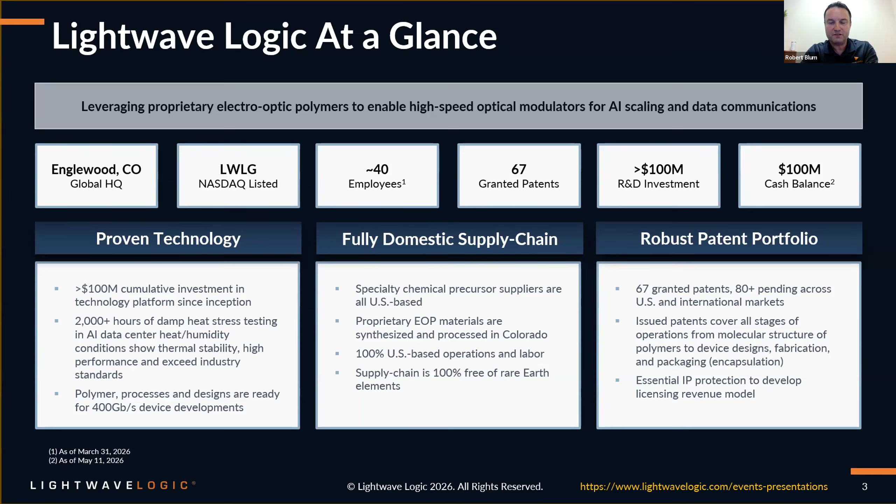We have a fully domestic supply chain, so the polymer is manufactured here and synthesized here. And we have a very broad patent portfolio, 67 granted patents and many more pending. Our business model is really around licensing the IP, enabling the foundries and the design houses to make enhanced silicon photonics chips using our material to get to high speed, very low drive voltage modulators.

One of the things that I'm personally very excited about is the silicon photonics momentum that we're seeing. So when we launched our first silicon photonics product at Intel in 2016, the total transceiver market was about $5 billion, and the silicon photonics portion was minuscule, really. And 5 years later, in 2021, the transceiver market was about $11 billion, and less than a quarter was silicon photonics. So picking up some momentum.

This year, we're really seeing the cut over where silicon photonics is more than half of the transceiver market. So about $20 billion in transceiver sales is based on silicon photonics today. And the market forecast shows that this will grow to more than 70% by the end of this decade. So very exciting times for silicon photonics. And this is really the platform that we're leveraging.

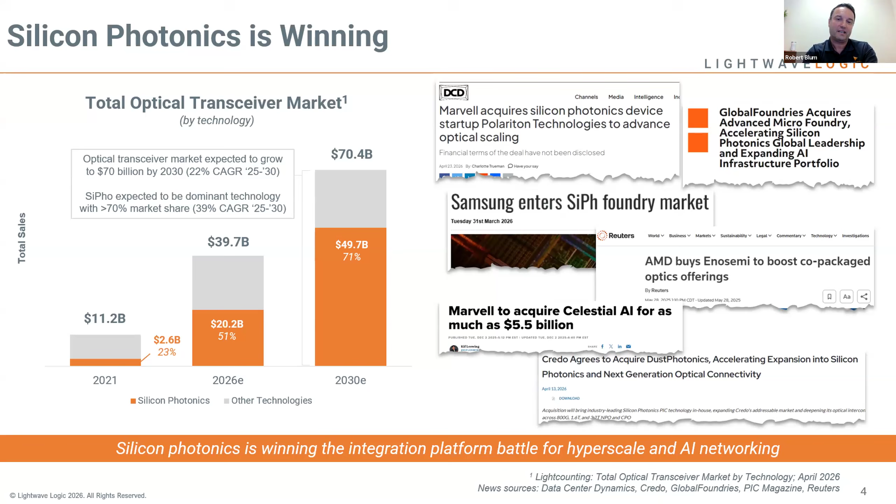And obviously, silicon photonics is great because it's wafer level manufacturing. It leverages all the goodness that CMOS and wafer level manufacturing gives you, but it has some limitations in terms of performance. And when you look at what is needed for some of these AI clusters, they're very much limited by the connectivity, and you're looking for high speed or advanced modulators that can integrate very tightly, that have high bandwidth, but also very low drive voltage, low power consumption, low insertion loss, and high reliability.

And so there's a few opportunities to enhance silicon photonics. If you look at the two main options, one is you can use inorganic electro-optic materials, such as thin film lithium niobate or barium titanate or similar materials that are largely not compatible with silicon photonics foundries, but you can add them afterwards. Or you can use organic electro-optic materials like the silicon organic hybrid modulators that we're going to talk about today.

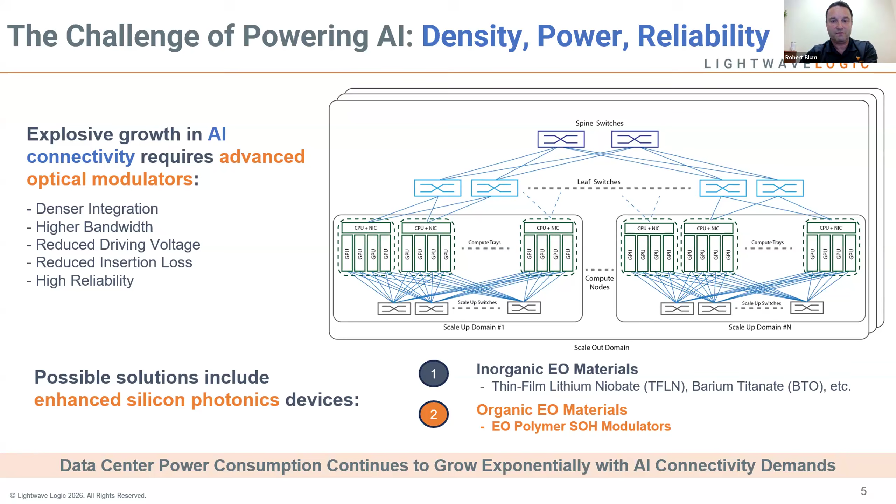And one of the big advantages is that it's a material that is compatible with silicon photonics foundries. You can integrate it through spin coating, just like a photoresist. So foundries are very familiar with that material and the deposition methods. And also the electro-optic coefficient is much, much higher than those of the inorganic materials. So you can make much more compact modulators than you could with some of these inorganic materials like TFLN.

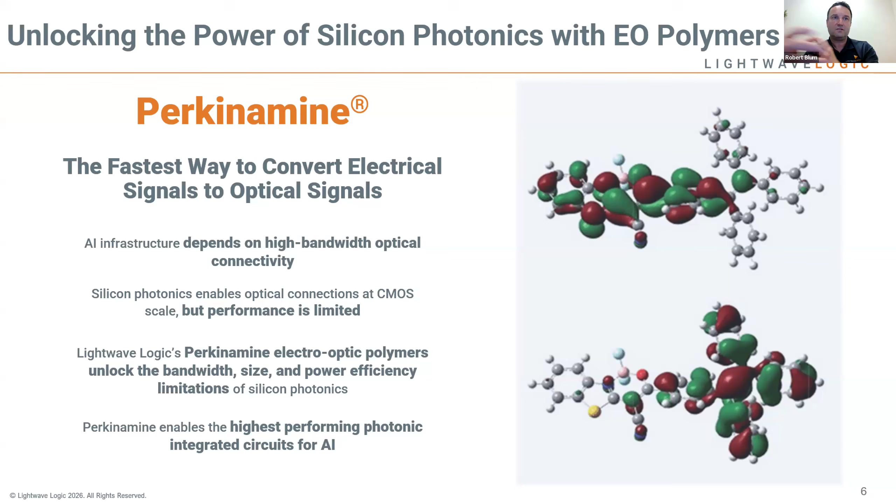So perkinamine is our chromophores, and they're dipolar molecules that we design and synthesize here in-house, and they're enabling us to get to these high figures of merit. If you look at the fundamental effect, you have a dipole molecule that in its ground state is already polarized. Then when you apply an electric field, the electron cloud moves over. So you're basically polarizing the molecule.

And because you're only moving electrons around, this is essentially instantaneous. So you're not limited by carrier mobility or other effects that limit the performance of other modulator technologies. So for all practical purposes, the bandwidth of the material itself is essentially unlimited for the applications that we're looking for.

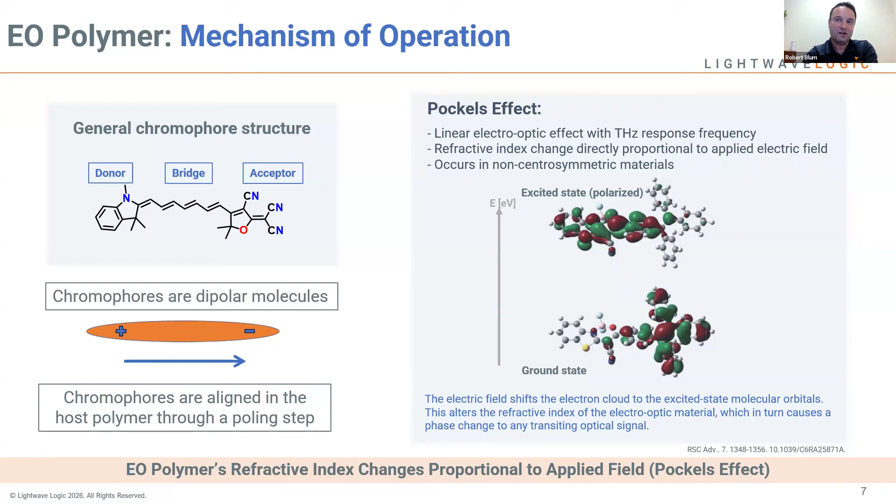So in essence, you etch a slot into your silicon modulator, and then you backfill it with polymer, so that you end up with a hybrid mode where the mode is in the silicon and in the polymer, and you're essentially only limited by the RC constant here.

And so you're making these Mach-Zehnder modulators as an example, even though you can make ring modulators as well. But for these Mach-Zehnder modulators, you basically have two arms that are both filled with polymer. And then what is key is that you encapsulate it, because you have to protect the material from oxygen to prevent degradation, and particular photooxidation.

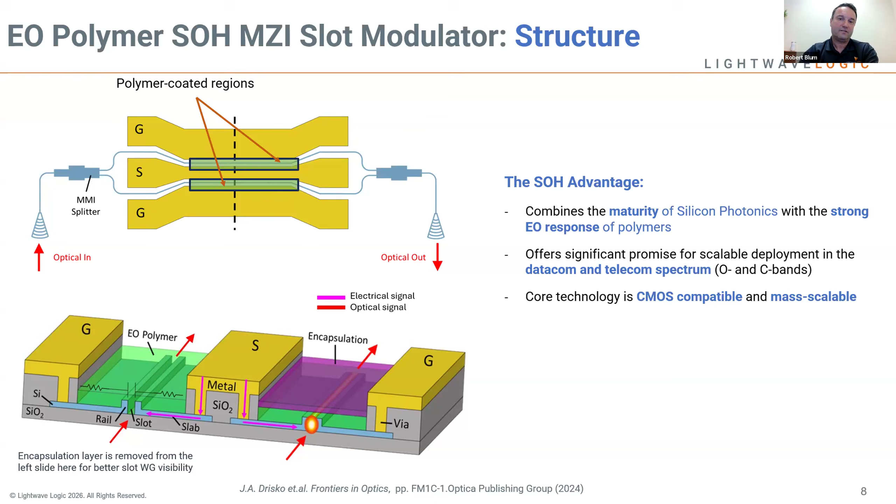But the key part for us is we're really combining the maturity of silicon photonics with the very strong electro-optic response of these polymers, creating these silicon organic hybrid devices for really wafer scale photonic integrated circuits, and leveraging everything that's good about silicon photonics, and enhancing it with the electro-optic polymers, right? So it's really key for the scalability, because when you look at what the hyperscalers need, it's really millions and millions of devices, and for that you need a mature, scalable technology.

One of the key parts is how to deposit that. So basically, the foundries have to etch these slots in the waveguides. They have to open up the oxide so that the slot becomes accessible. And then we deposit an underlayer and the actual polymer down into the slot. We then essentially remove it where we don't need it. And then we deposit the encapsulation, and then subsequently, we remove the encapsulation where we don't need it. So that's the last step.

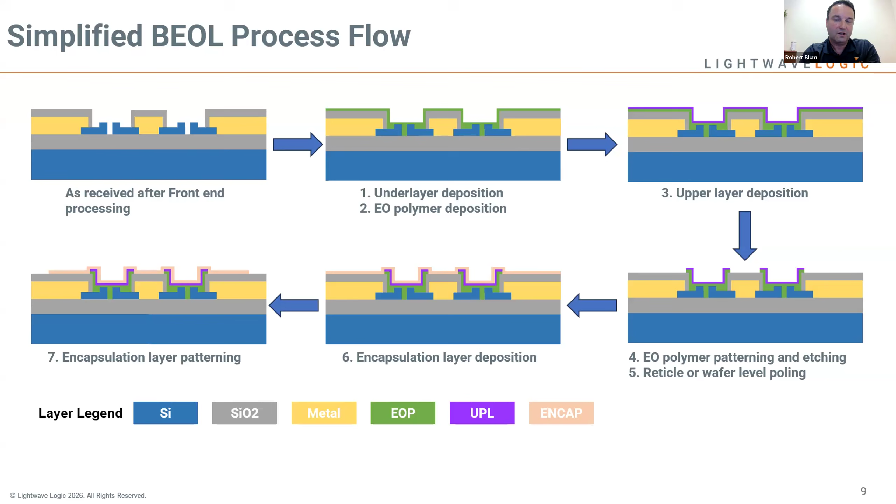So it's a pretty simple, simplified process that I'm showing here. There's obviously a few more steps, but all the tools, all the processes are standard to CMOS foundries. So it's really very straightforward to implement these deposition steps, the spin coating, and the encapsulation processes in the foundry. We use basically atomic layer deposition for the encapsulation, and for some of these other layers. So all tools that are now standard in the foundries.

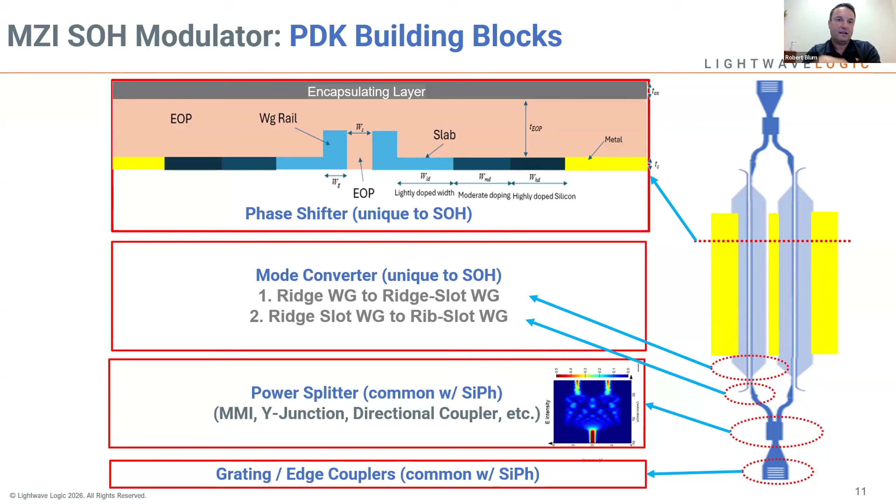So this is obviously the key part of the phase shifter. And these building blocks are part of the PDK that we have. So if you, for example, look at this mode converter, if you start on the top right, you have the ridge waveguide, which is in silicon, and again you have to transition that to this ridge slot waveguide in the middle, where you have a little bit of a hybrid mode, and then eventually it transitions to that rib slot waveguide, where you have basically this slab that is kind of containing the mode, and then obviously the slot section, which is really critical.

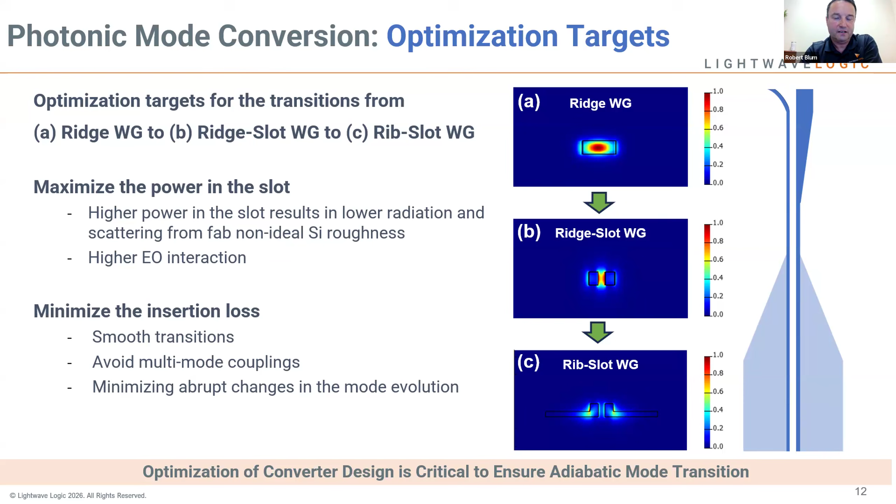So those transitions have to be adiabatic to minimize losses. You obviously want to have them as short as possible, because you don't want to spend a huge part of your modulator length on those tapers. But again, key for good performance is obviously these taper sections, and they will vary from foundry to foundry, because each foundry has slightly different geometries that they're able to produce, or that are part of the regular PDK.

And then on the phase modulator section, this is where it becomes very, very interesting. So again, as I mentioned before, we're basically RC limited. If you look at the frequency, you want to have as low R and as low C as possible to get to high frequency. So in a way, you want to increase the doping, but then obviously there's a bunch of trade-offs, right? So if you have high doping, you will also get higher losses, because the mode will start to see the doping in your slot, so you have to trade that off.

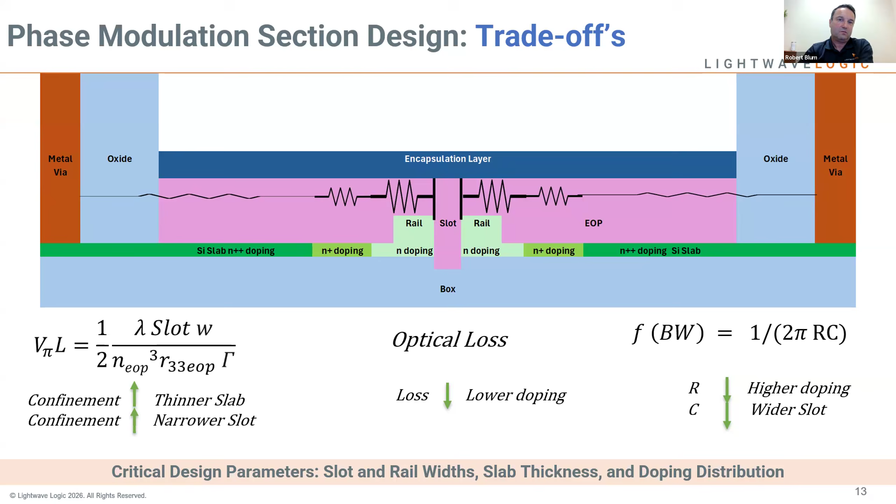Similarly for the slot, if you make the slot too narrow, then you have those trade-offs basically with your VPL and also with your frequency. So there's a few different trade-offs: the slot width, the rail width, the doping, the slab thickness, all of these are part of the trade-offs that you have to work with. It's pretty straightforward in a way, but obviously you have to implement it for a specific foundry and really optimize the doping, and the transition from a highly doped N++ doping to the low doping closer to the mode is very, very critical.

And so, to give you some examples of the expected bandwidth, here for different lengths. For example, if we make quite a short modulator, 250 micron long on the left-hand side, you see here we have a 3 dB electro-optic bandwidth of about 138 gigahertz in this simulation. And as you go to longer modulators, for example, the one on the very right would be 1 millimeter in length, so 1,000 micron length. Those show a 3 dB bandwidth of about 76 gigahertz.

But also what is very nice with these types of modulators is that there's no rapid roll-off in the frequency, so it's quite linear. For example, your 6 dB point is around 135 gigahertz or so. So this is very much workable for a lot of applications. And our VPL, which I didn't put on this slide here, is less than 1 volt millimeter. So for these devices here on the right, for example, you have drive voltages that are less than 1 volt peak to peak or lower. So this is quite advantageous in terms of performance. Basically, you can get very compact modulators, sub-millimeter, with bandwidth above 100, 110 gigahertz or higher, with very low drive voltages.

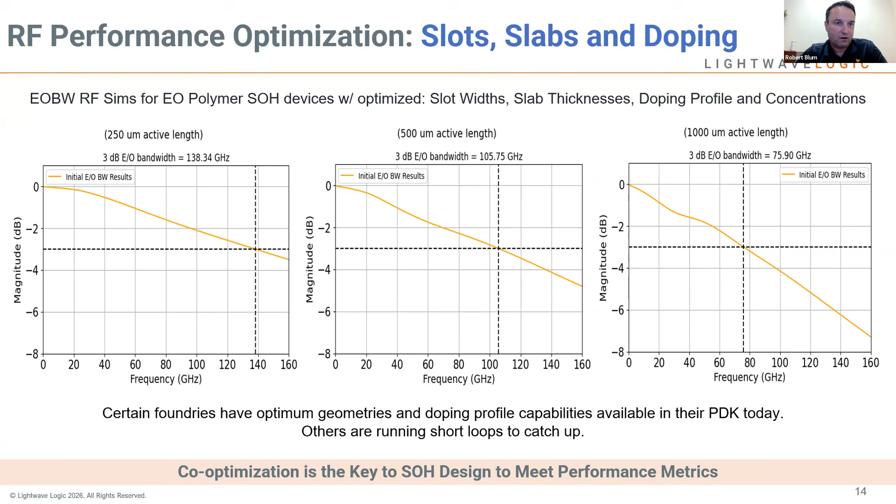So hi, everyone. Today I want to show you a library that we've built using SilTerra's silicon photonic platform PDK. Not just the static layouts, but I recorded a video showing how to bring components together to make a final device. Everything is written in IPKISS, so we script components and regenerate them on demand. So I'm going to walk you through this in a bottom-up way, starting from a slot waveguide, which is the core electro-optic element and the basic building block of the component, building up through the phase shifter test structures for on-wafer measurement, and finally a complete MZI.

So each step reuses the step before. So you see the hierarchy come together in KLayout. So Robert, we can start the video now, and I can show you guys a little.

So on the left, yeah, we have the library of our components that we design. We have a bunch of them, and the most basic one is the trace that I'm showing there. And the trace is basically a cross section. And what we do, we import IPKISS, the SilTerra PDK library and our library of components, the trace and the slot waveguide.

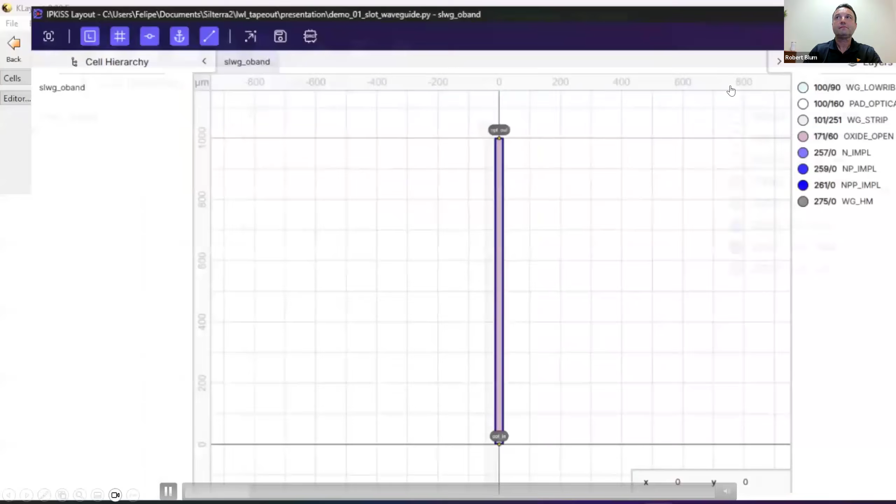Yeah, so you can see here just a straight segment of the slot waveguide. You can see that in IPKISS visualizer. You can also use KLayout to check it out. So you can see the numbers that we used in the parameters, such as the oxide open window that we put 20 microns wide in our example. This is the actual region where you etch the oxide and you deposit the polymer to make your device.

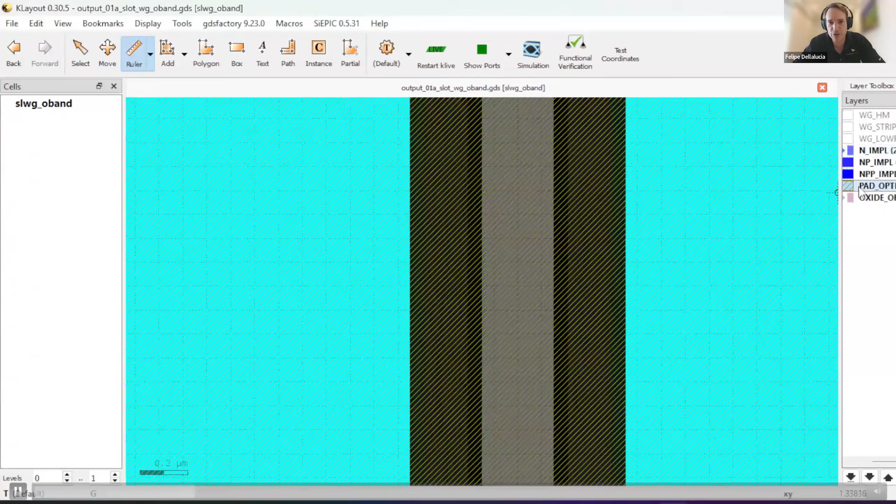It's also parameterized the rail width and the slot width that we're going to use in the waveguide. So in this case here, we use 200 nanometers for each. And we also have the doping profile parameterized. I have 2 microns and 5 microns for low doping and intermediary dopings. And the length, like I showed before, 1 millimeter, for instance, you can have shorter than that, that Robert showed in the simulations. So this is the basic building block.

From that, you can start increasing the hierarchy, such as making a phase shifter. So the same way that we did before, we just import the SilTerra PDK and the phase shifter component from our library. And you can set the active length the same way that we did before. We instantiate the cross section in the phase shifter. We use the same cross section that we used before, the active length. And it's also parameterized the metal width that we're going to use in the electrodes and the taper of the metals that we're using.

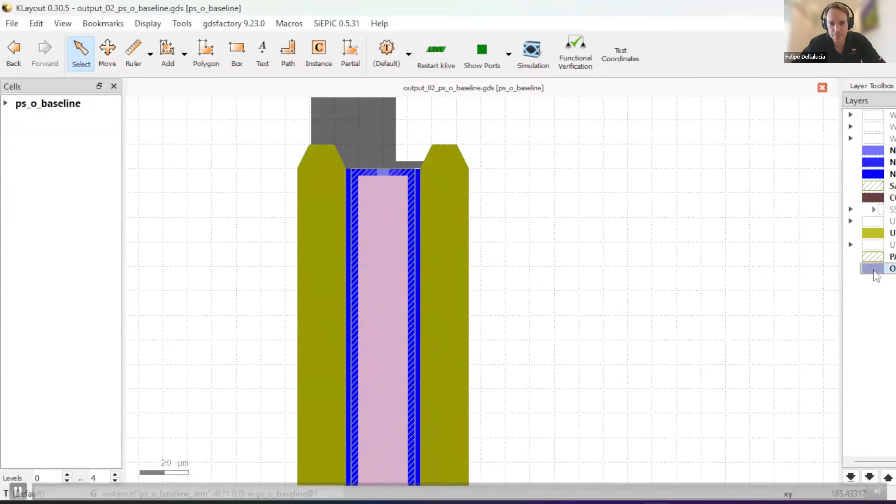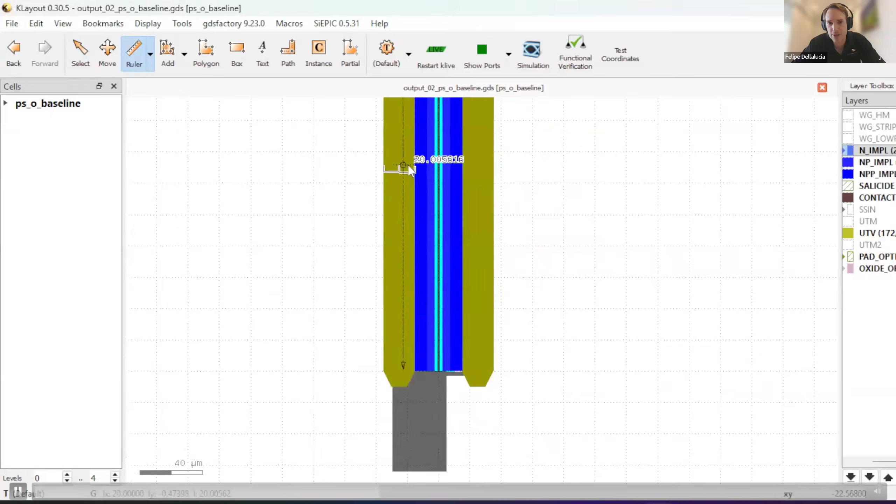So once you run your code, you can check out how the phase shifter starts to look like. So you have the oxide open window, the same one that we showed in the slot waveguide. We have the optical input and output on the top and the bottom, which are the mode converters. And we have the metal for the electrodes, 20 micron wide, like I showed in the parameter configurations. And the taper for that metal 10 micron long, we can also extend or make it shorter depending on your design. So this is the second level in the hierarchy.

We can also add bond pads to that design. So we also have a component there in which we include the phase shifter with the bond pads that I'm showing there. The same thing, we pick an active length. We use the same cross section that we have used before, the same phase shifter, and now we have some bond pads. The bond pads that we used are imported from SilTerra's PDK. So we just retrieve those.

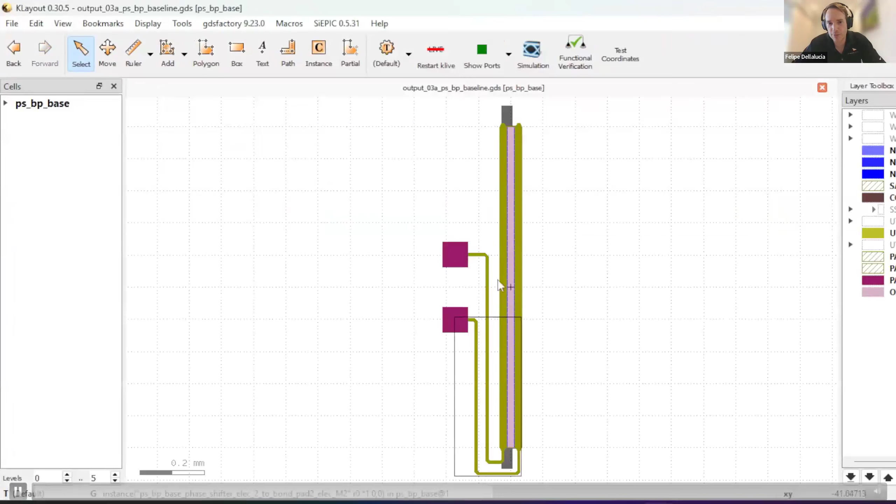We can also set the bond pad dimensions, how wide they are, and the spacing of the wires that we're going to use to route them. And then once you run it, you see the bond pads and the routing of the metals. So very simple and straightforward. You have the 80 micron bond pads in the full metal inputs and outputs port.

So here, for the next step, we can include the optics inputs and outputs. So we can add the fiber arrays and the grating couplers that we also import from SilTerra's PDK. So you also set the active length that you want. In this case here, we use the same parameters from the waveguide, the same parameters for the phase shifter. Obviously, you could change that, the bond pads, and then you can also set the fiber array that you're going to use.

In this case here, it's 4 grating couplers. We import that from the PDK with that command there. The separation between the grating couplers depends on your test measurement setup. So in this case here, I'm using 127 micron. And then you can just make a test key for that component, and you can run it.

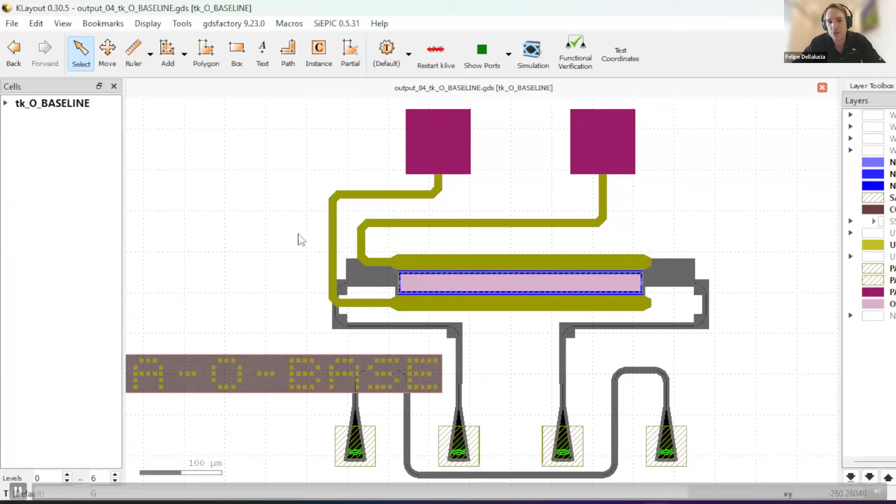And when you check it in KLayout or in the visualizer, then you can see the full phase shifter with the grating couplers, the fiber arrays, and the bond pads, the routing from the input to the output of the phase shifter through the mode converters, and lastly the grating coupler. So with this, you can do the poling in your polymer, and you can also apply voltage and do some slow speed modulation to extract parameters from your components such as VPI and loss.

Last but not least, I have here a quick demonstration of how you would make an MZI. The same way, you import the SilTerra PDK and the library of components that we have there. So we have the traces, and also an MZM from our library. That MZM, in that case, has no metal on it. It's just the phase shifters. But the components from the foundry, such as the MMIs, are present in that. The same way, we can set the parameters for the waveguide.

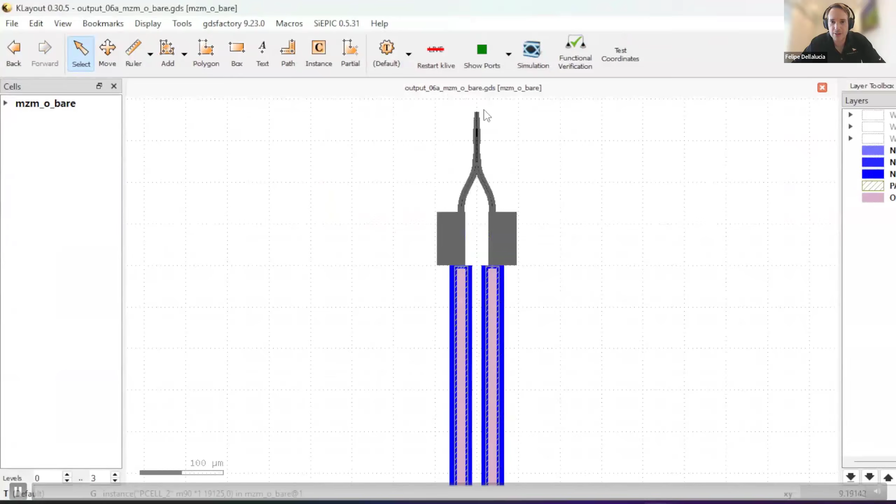And once we hit the run button, we can see the MZI with the 2 arms of the Mach-Zehnder. So on the top there, it could be your input. You have the MMI, you split the waveguide in 2. You have the mode converters for each side of the arms. You have the phase shifters for both sides. And then you have the output mode converters, and you combine them back using the foundry MMI.

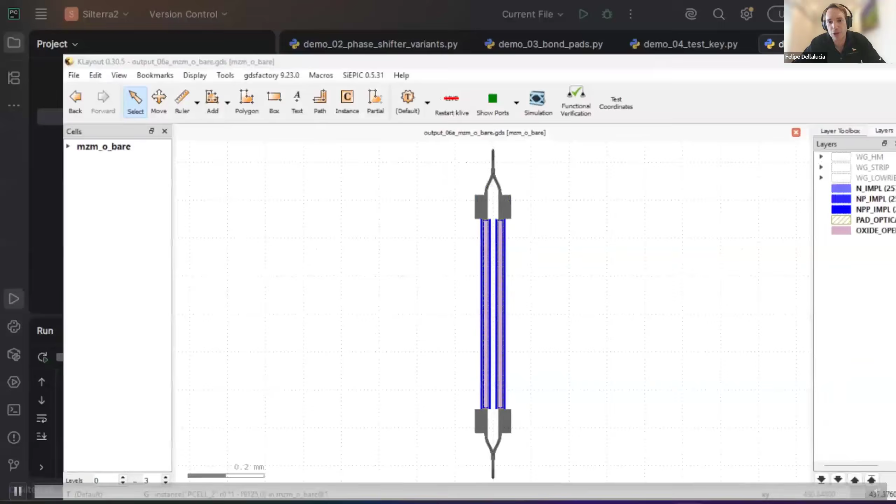So from that, we also have the component with the RF electrodes, which you can build on top of this, the same way that we've done with the phase shifter. So I wanted to show how simple that is. It's 2 lines of code, and you can make a full device. But the key takeaway here is that every level of this hierarchy, from the raw slot cross section to the complete RF-driven modulator, is parameterized and generated in gdsfactory. So you can regenerate any variant or DOE configuration on demand, rather than hand drawing layouts and taking a long time. So it's pretty simple, very straightforward to use.